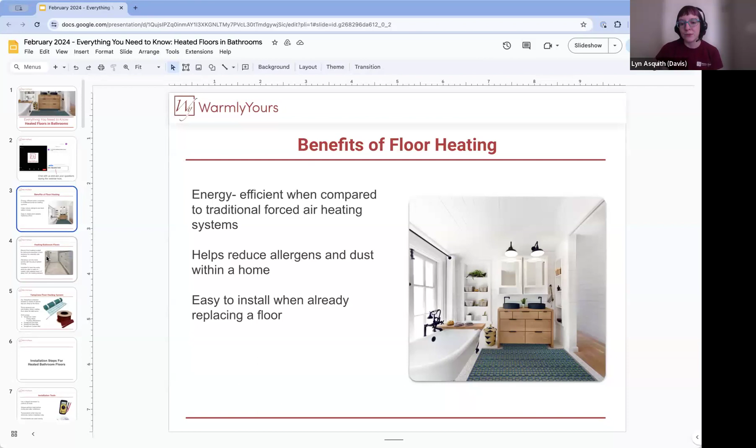These products are really easy to install. If you're already going to be replacing the floor or you're doing a new build, adding floor heating is a really great option.

Scott, can you tell us a little bit about why people would want to heat in a bathroom? Because tile is cold and it's very cold to your feet, and tile can also be cold if you don't have heating wire directly under it.

A lot of people will say, well, can I just get a roll of heat and put it right down the middle of this walkway on the screen? I just want to put it right down the middle of the room. Will that warm up the entire room? Will that warm up the entire floor? And the answer to that is it doesn't.

You only get heat where you have the heating wire. So that's why we try to cover as much of the space as we can, because wherever your foot is going to go, you want electric heat there. If you look at this picture, not only do you want it running right down the middle of this walkway, but you can see there's a cabinet on the right side there. You're going to want the heat in the toe kick area too, because that's where you stand. If there's a mirror there, you don't want to have warm heels and cold toes. You want to get that right up there under the toe kick. So it's very important when you're looking at an installation plan or thinking about heating your space that you think about where your feet will hit this floor, and wherever that is, you want heat to be there.

Because if you look at the wire, the heat only transfers 1.5 inches on each side of the wire. That's why most of the time we do spacing at 3 inches, because that gives you 1.5 inches this direction, 1.5 inches this direction, and it gives you a nice smooth heat across your floor. If you get the wires too far apart, then you're going to have a cold stripe down the middle because it only travels 1.5 inches each direction. So that's one thing you want to look out for when you're heating the bathroom floors.

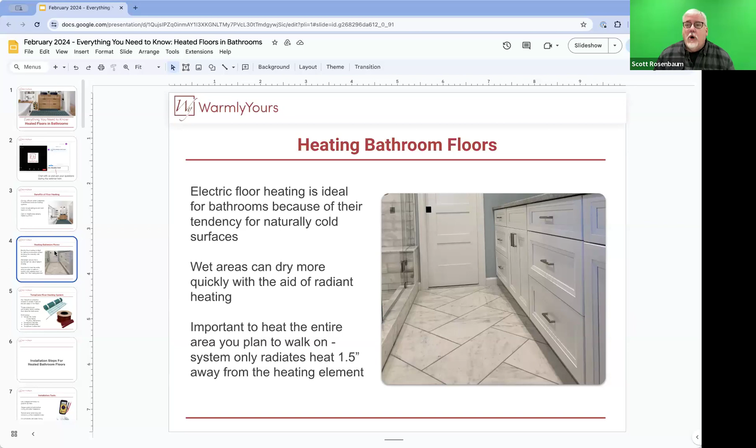You always want to remember to install your floor sensor, because that's the best way to control floor heat, is actually put the sensor in your floor. It's very important if you have a heated floor under carpet, laminate, or LVT or something like that. You always want to control it by the floor sensor.

Our TempZone floor heating system is definitely our most popular floor heating system, especially for heating in bathrooms. It includes a lot of different options that are really ideal for heating underneath tile. Also, our TempZone products are wet location listed, so again, they're ideal for bathrooms specifically.

We're going to be going over the different options that we have available for TempZone. There are a few different ways that you can install these products, so we're going to touch on each one and talk about the different installation methods and some pros and cons.

We're going to talk about our TempZone cable, which can be installed using either fixing strips or our Prodeso membrane. We'll get into that in just a moment. We're also going to talk about our TempZone flex roll, our easy mats, and our TempZone custom mats. There are a lot of different ways to heat tiled floors.

Some of our competitors only have one way to do it. You must buy this and you must buy that. You always have to buy a membrane, but for us, you don't. You can save a lot of money and time by not using a membrane on floors that don't need them. Not every floor needs a membrane with cable, and we're going to show you the reasons why.

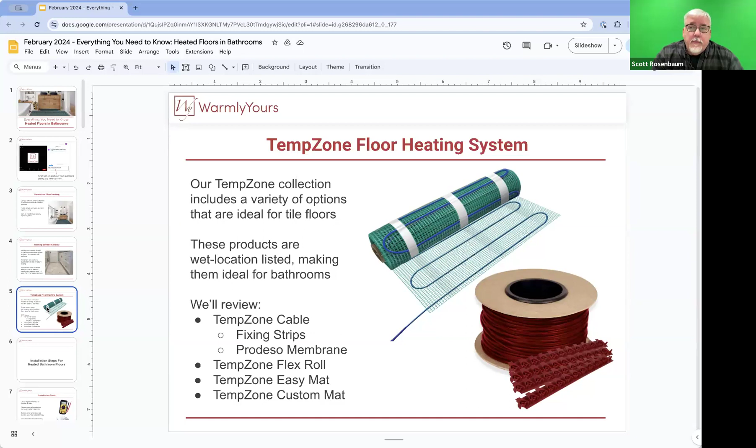So we're going to go over some of the installation steps for heating bathroom floors before we get into the nitty gritty of the different types of TempZone systems.

So Scott, can you tell us what are some installation tools you'll want to have on hand? Yeah, you're not going to need a snap-on tool truck to back up to your house to start putting these floors in. They're very simple to install. They don't require specialist tools at all.

All you need to do is go out and buy a digital ohm meter. The one pictured here is under $25 at a big box store. You should also get a circuit check when you're purchasing the product. Those are the only two specialized things you'll need, because you can't do the installation without both, since you need to test the product before, during, and after to verify a good installation.

If something happens to the product before it arrives on your doorstep, and you put it in the floor without testing it, then try to turn it on and it doesn't work, something may have happened to it on the way from us to you. The only way to know that is to use a digital ohm meter.

A digital ohm meter is not a substitute for a circuit check. They do two different things. A circuit check only monitors the wire to see if you damage it by creating a short or by cutting it open and creating an open circuit. The digital ohm meter gives you ohm readings that you use to match the label that comes with your product, to see if it's within certain specifications.

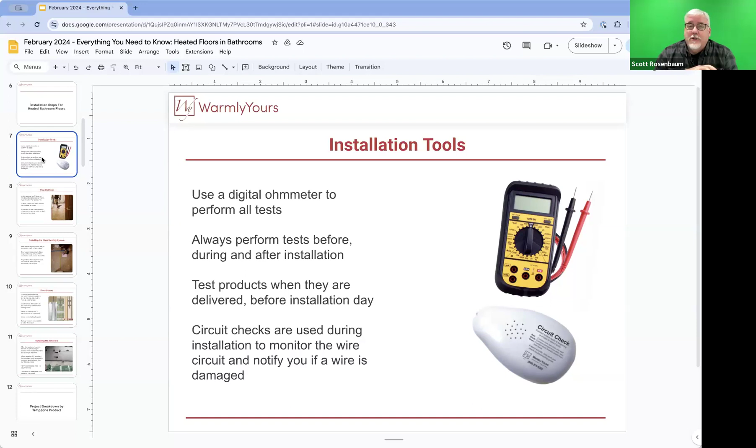Otherwise you're going to need scissors, and maybe a hot glue gun. A lot of people have those, but a hot glue gun is something you definitely want to get, because that's going to help you install it. But that's about it. Everything else you can find in your junk drawer. If your junk drawer is like mine, it's about the size of a house, and there's a lot of junk in there - I could literally raise the Titanic with the stuff in my junk drawer. But the only specialized stuff you need is what you see here.

So the first step is preparing the subfloor. You want to make sure you're installing on a good surface so you're starting out really strong. So Scott, can you tell us how one would prepare a subfloor?

Yeah, if you want to stick something to a subfloor, the subfloor has to be clean. You can't have it be a dust bowl - you've got to get that surface clean. Maybe mop it up or vacuum it, whatever you need to do to clean it, because the hot glue needs something to stick to. You need to be able to adhere that product to the subfloor, and the only way to do it is if your subfloor is clean.

Also, you want to make sure that there are no nail heads sticking up out of the surface, because if you have a nail head sticking up and you put the cable over it and then step on it, you're going to smash that cable and cause damage. So you don't want that to happen.

So you're going to want to make sure that you pull all the staples. If there are any staples in the surface, you want to pull those all out. If there are any nails, you want to make sure you remove those. And any screws that need to be screwed down, you're also going to want to do that.

Also, if you are going to be using self-leveling, you need to clean it and then put primer down. But what you want to do is clean it and then seal any holes in the subfloor, because any holes in the subfloor will cause that self-leveling to visit the floor below it, which means your living room could be full of self-leveling if you don't prep that floor correctly. So seal any holes, clean it up, and prime it if you're going to be using self-leveling.

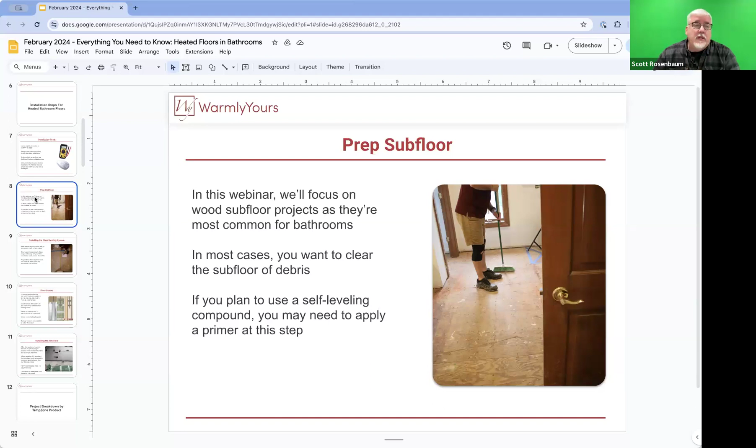So one of the first things you'll want to do is mark areas where the product is going to go and where it's not going to go. This way you have a really good idea just by looking at the space, kind of what you're going to be working with. One of the things that we offer here at WarmlyYours that is really going to make this a lot easier for you is our SmartPlans.

And we're going to touch on those a little bit more in just a moment, but these are going to actually show you step by step all the installation instructions, as well as a layout of the product in your specific space, so that you know exactly where the heat will be going, where it won't be going, and then you can make sure that you are laying it all down properly.

One of the things you also want to make sure that you're doing as you're laying it down is that you are securing either the cable or the mesh, whichever system you're utilizing. Make sure it's secured to the subfloor well.

Yeah, the number one thing, I talk to people who are interested in getting a floor heating system, and they call in and start asking a zillion questions because they want to try to figure out, how do I lay this out? How much should I buy? I'm trying to figure out how much I need to buy online.

The simple thing is just make a sketch of the space and give it to us. We'll do the installation plan for you.

The number one thing I see, new people are full of consternation, because they're trying to figure it all out for the first time. It's like I'm trying to build a rocket ship for the first time, and I'm just going to go on YouTube and look about doing rocket ships. I'm going to let the rocket ship people put that rocket ship together for me, and I'm going to worry about other stuff.

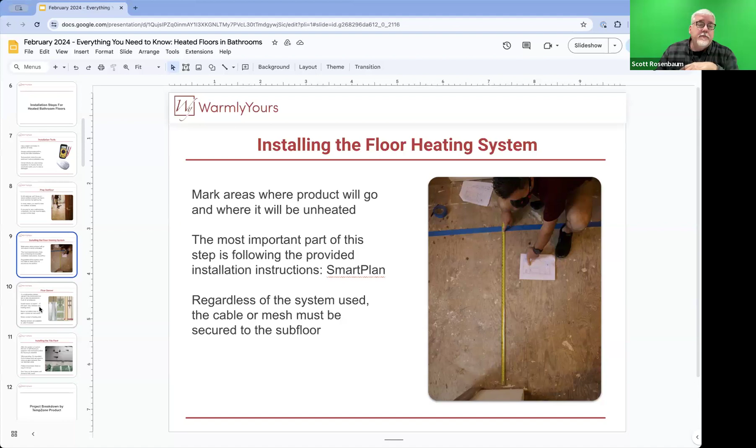So we're supplying the measurements of the area that we can heat. Just give us a sketch of the room with dimensions, and mark on that area what's going to be there, like if there's going to be a cabinet, no heat there. There's going to be a tub, no heat there. If you want heat in the shower, let us know, we can do that. Don't try to figure it all out if this is your first time, because there's a laundry list of things we already know we'll take care of for free, no charge. Why work harder when you can work smarter and let us do the work?

So our floor sensor is going to be one of the really important aspects of installation. You want to make sure that you're installing that sensor properly so that you can control the floor heating exactly to the degree. Scott, can you tell us some tips and tricks when installing a floor sensor in the system?

Sure. Number one problem I see with people installing floor sensors is they want to run it out into the middle of the room. You don't need to do that. You simply need to get it 6 or 8 inches into the open loop. This is what we call an open loop, where there's no cable that your sensor is going over. Same thing here with our floating floor system, it goes between 2 of the heating wires. You just put it between the 2 heating wires, because you're getting heat 1.5 inches from each side, and it's going to heat up that sensor. If you get that sensor on top of the wire, it'll heat up too fast, and your system will just go on and off repeatedly, and it'll never get warm.

So make sure you put it in the right place. Look at your room in the morning, during lunch hour, and at night or in the afternoon, and see where the sun hits the floor, because where the sun hits the floor is where you don't want the sensor. That sun will usually warm up the floor more than our system will, getting it much hotter. So you don't want a sensor sitting there in the sun, because that area will say, oh, this floor is really warm, but it isn't really warm everywhere, it's just warm there while the rest of the floor is very cold. That's why you never put the sensor where the sun will hit it. Always try to keep it out of the sunshine, into the heated area.

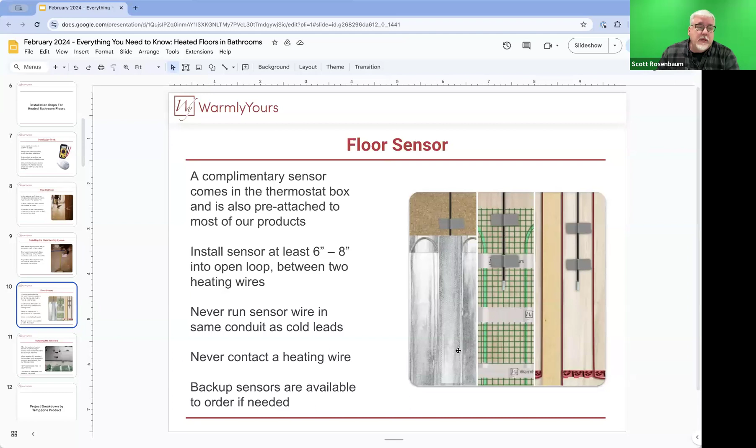Yes, that was comprehensive. Thank you so much, Scott.

So once you've laid out the system, and we'll be going over that process shortly, you'll want to lay out either your thin set or the self-leveling concrete, whichever you're using, before the tile floor is installed. Scott, I know you've worked on a lot of these projects where the tile floor is being installed - can you tell us some tips and tricks when actually putting the flooring down?

If you're looking at this picture and you see this in your house and you're doing this installation yourself, and it's your first installation, I can guarantee you've used a laundry list of expletives up to this point, because this is the single step method. It's very difficult for beginners, and even some experienced people, to get this installed with no lippage on the tile, doing this all in one step.

This is the single step method where they put the system down on the floor, the green mesh, then put thin set, and then push the tile down into that. It's very difficult to get those tiles the right height and make sure they don't have one up against another - that's what lippage is. One's really high, one's really low. So whether you're doing this for the first time or the tenth time, you might want to take a different approach.

Cover it with 1/4 of an inch of thin set first, come back tomorrow and then put thin set under the tile on the back of the tile, and push the tile down using these levelers, because that will do a couple things.

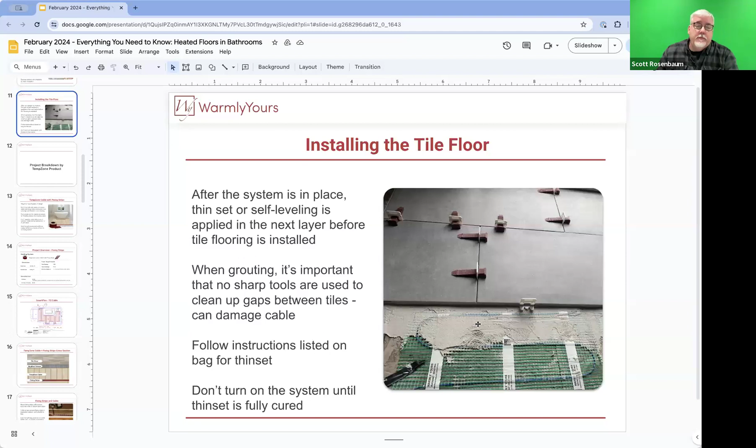Yes, it is exciting. I totally understand wanting to turn it on right away, but make sure that you're waiting just a little bit longer, and the patience will pay off.

So we're going to go over a project where we were heating in a bathroom, and we're going to show the different TempZone products in that space and how they would be installed.

So we're going to be starting out with our TempZone cable, and specifically we're going to talk about installing TempZone cable with our fixing strips. Using fixing strips with cable is a really great way to have a lot of flexibility in the design and layout of your heat. It's great for rooms that have odd angles. If there's a curve in the wall, something like that, it's going to be very easy to get into those weirder, harder to reach areas than if you were cutting and turning a mat.

Scott, can you kind of tell us about the spacing when using fixing strips? Yeah, the fixing strips, the little knobs are spaced 1 inch on center. So if you do 3 knobs, that's 3 inches. If you do 4 knobs, it's 4 inches. So it's very flexible, allows you to do different spacing if you want to.

Just keep in mind that a small bathroom on the second floor above a heated kitchen with no exterior walls and no windows takes a lot less watts per square foot than a large huge bathroom on a concrete slab with 27 windows, 3 exterior walls and skylights. Those are both bathrooms, but they take completely different amounts of power and watts per square foot. So a second floor bathroom, you may be able to do 4-inch spacing using these spacers, whereas one over an unheated crawl space, you'd want to use 3-inch spacing. But 3-inch spacing is as close as you can get, so you don't want to go any closer than that.

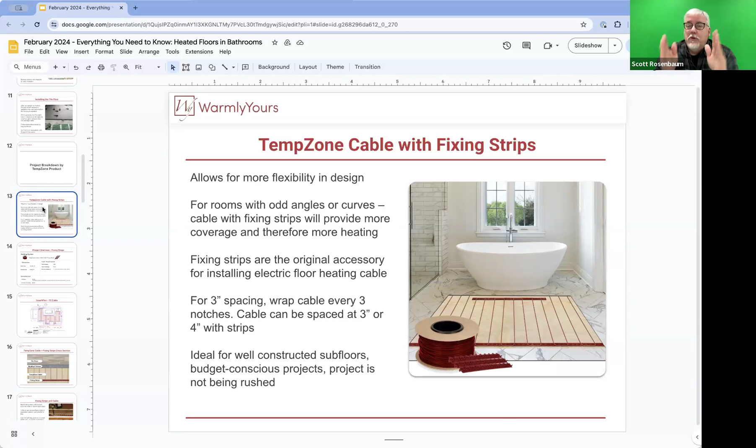But this is a great way, it's a great budget option. You don't need a membrane here. If your floor is in really good shape and you've got good spacing on your floor joists, you don't need an anti-fracture membrane. You can use just the cable and the strips and save yourself hundreds of dollars.

So the project overview for this specific project with fixing strips, the total area of this bathroom we're looking at today was 123 square feet. When you're heating with the strips, we got to about 94 square feet of heated area. So the breakers, you're looking at just one 15-amp breaker. It's about 11, almost 12 amps, and you're looking at just about 5 cents an hour to run.

We're going to be comparing the project overview for each of our different types today so that you can actually see the different types of heating systems and how much coverage they'll give you, what the operating cost will look like, and the differences between those.

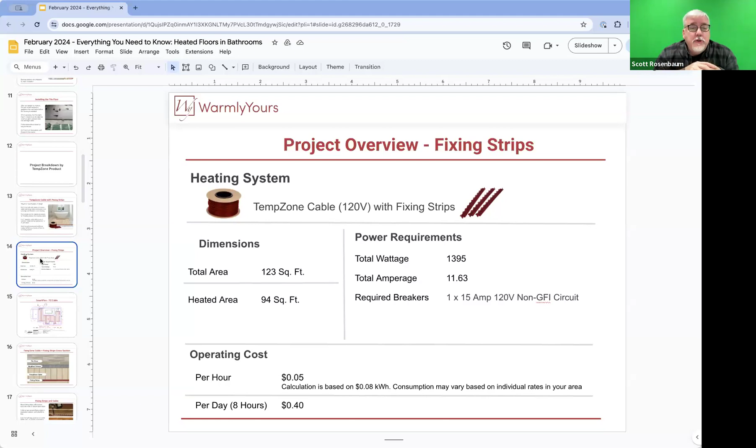When people think about doing their bathroom, they think, I'm going to heat every square inch of this bathroom. And you're not going to heat every square inch of this bathroom. You're usually going to heat around 80 to 85% of the bathroom because of things like a bathtub, a toilet, spaces around the walls, a shower. You can heat the shower if you wanted to, but that's the area of a bathroom. You're going to heat about 80 to 85% of it, just depends on that particular space.

You can see what's great about this smart plan we're telling you about. In this smart plan, it tells you what the amperage is, it tells you what the total wattage is, it tells you all this information, cost per hour, it's all listed there at the bottom. It tells you what product you're going to install and what spacing you're going to use. And that's all been figured out from the drawing that you gave us. So if you look here, the important things on a smart plan, and we're going to talk about them here and then gloss over them later, but you're always going to look for a T because that's where your thermostat is.

You're always going to want to look for a triangle because that's where the cable starts, and you're always going to look for a square - that's where the cable ends. Also on the plan, you're going to be looking for the halfway mark for the cable, and that's going to be a red dot because on the cable, it's a white dot since the cable's red. So we put a white dot on the cable, and that way if you see your white dot's over here, it tells you you've got the spacing too tight. If your white spot is all the way over here, it tells you to use 4-inch or 5-inch spacing instead of 3.

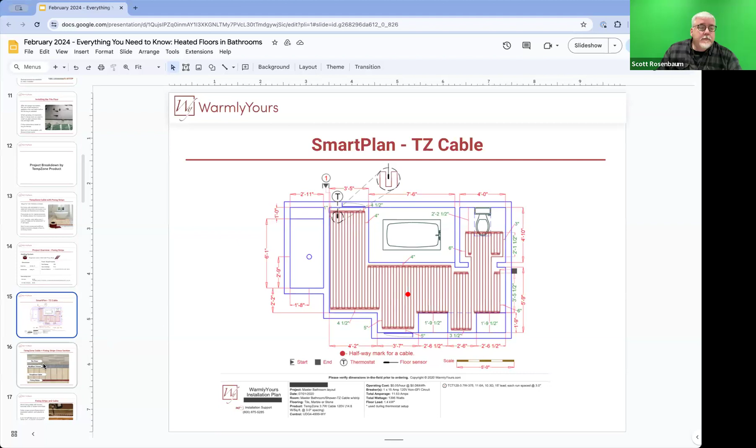Yeah, and if you're going to be using self-leveling instead, you're going to put a piece of masking tape every 2 feet across these, because that's going to keep it down and keep it from floating to the top of the self-leveling. No matter whether it's just the loose cable or the mesh and cable together, it's always going to want to float, so you have to make sure it stays down on the subfloor very well. That's why you need a clean subfloor.

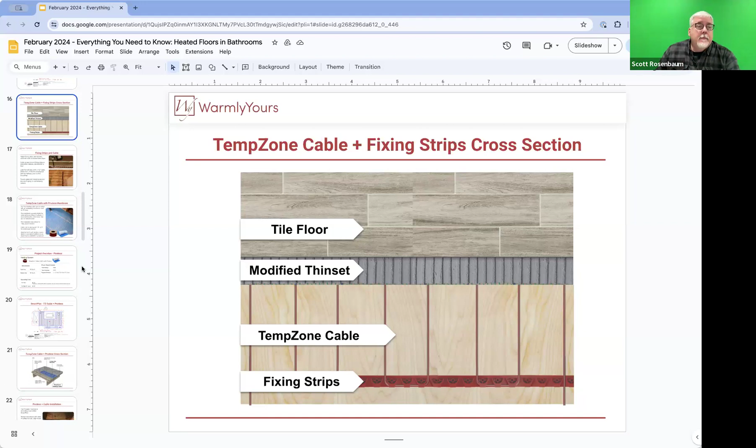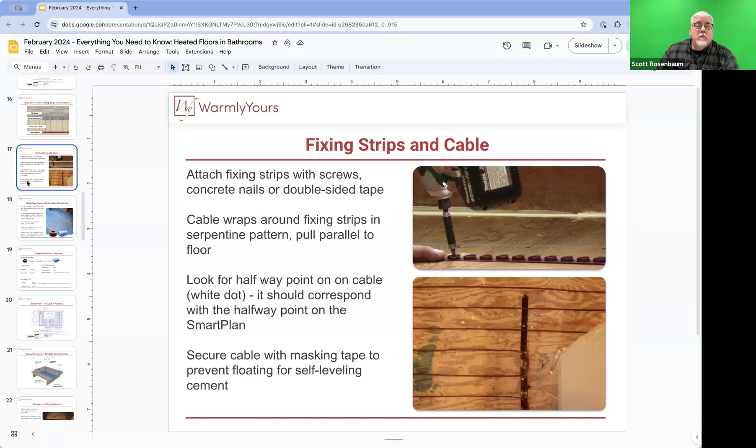Awesome. So moving on to our TempZone cable with our Prodeso membrane. This is a really common way to use TempZone cable, or heating cable in general. It's going to generally make the project a little bit faster to install, and it also adds a lot of extra support to tile floors.

So Scott, can you tell us where a Prodeso membrane would come in when you would want to use one? When your subfloor is a little bouncy, because it's isolating the tile from the subfloor. So if the subfloor deviates, if you step on it, if it creaks or anything like that, the membrane's here and the tile sits on top of it. Whatever happens underneath, the tile still is okay because it's on top of the membrane. That's what you're doing - that's when you do need a membrane. Not every single floor needs one, but when you need it, this stuff is very good.

What's also good about this is you can change the spacing as you go. What we're showing here is spacing every 3 spaces. You can also do 3-inch, or 3 space, 2 space, 3 space, 2 space, etc., to help use up cable, or add an extra space to use less cable. But this is an area where people walk all the time, so we put it about 15 watts per square foot here, with a 2-3-2-3-2 pattern. That can help you use up that cable if you have to. So that's where we're seeing the 2 different spacings on this floor.

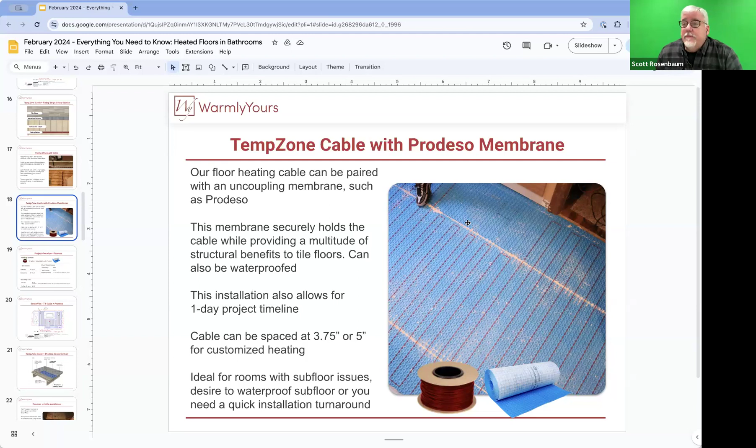One other thing about Prodeso is that it is also able to be waterproofed. So if you're waterproofing that subfloor, doing a wet room, or if that's just an extra concern for you, adding Prodeso is a really great option. All you need to do is buy our Pro Band, which comes on a roll, and you adhere that after you get the cable in, to these seams, and that will make your bathroom waterproof. Which is always a good thing.

So the project overview for cable with Prodeso. You can see again it was a total area of 123 square feet, and we heated about 107 square feet with this application. The cost per hour is 4 cents, so it's not very expensive. It is a very efficient system, cheap to run, and it's going to be a very easy system to install as well.

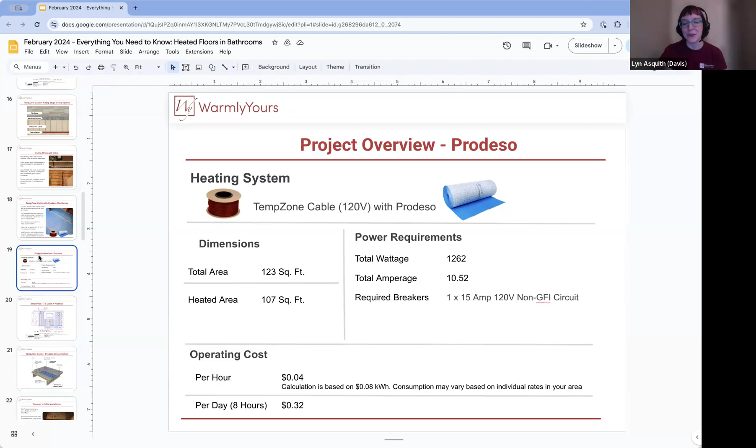That's why you can't just cut it and say, okay, I've used enough, I'm going to cut this off and throw the rest away. You can't do that. That's why this design is so important, so we get you the right amount. You don't have too little, and you don't have too much. When you're doing the installation, it's always better to have a little too little than a little too much.

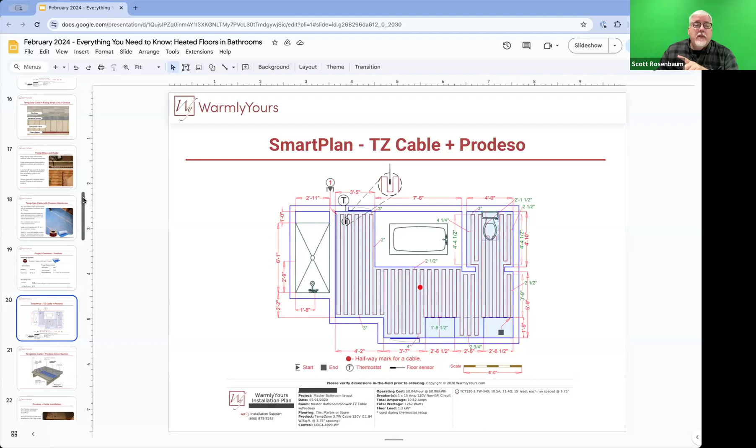With a wood subfloor like this, it's modified thin set. Then you put the thin set down on the floor, push the membrane down into it, run the cable back and forth, put thin set over the top, and lay your tile on top.

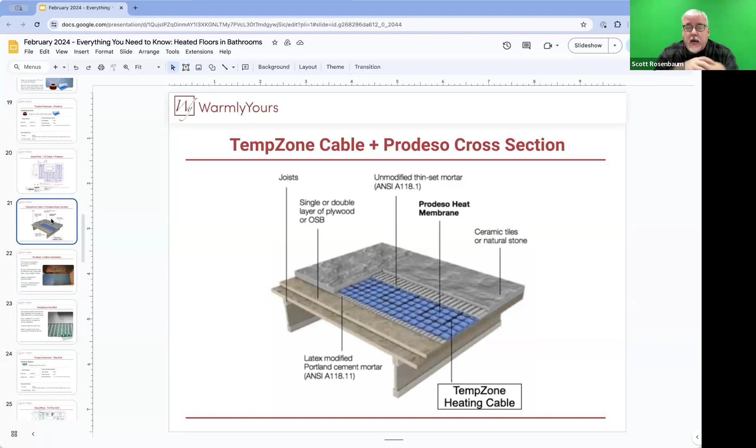When you're doing the install, it's very important that if you're only going to get so much time, let's say you start at 4:30 in the morning and end at 1 in the afternoon. At 12:30 you realize you've got enough time to do this much today, this part over here. The idea with this product is you don't cover the entire floor with thin set and come back tomorrow.

You only put thin set under the areas you're going to tile right now. You work your way across - thin set, push the tile down into it, thin set, push the tile down into it. You're not thin setting the whole thing. When we first started selling this years ago, people were used to using the cable on the mesh.

What you do there is lay it all out, then cover it completely with thin set, and come back tomorrow to do the second step. You don't do that with this one. You get it down, get the cables in, and only do enough for the tiles you're using. Very important to do that.

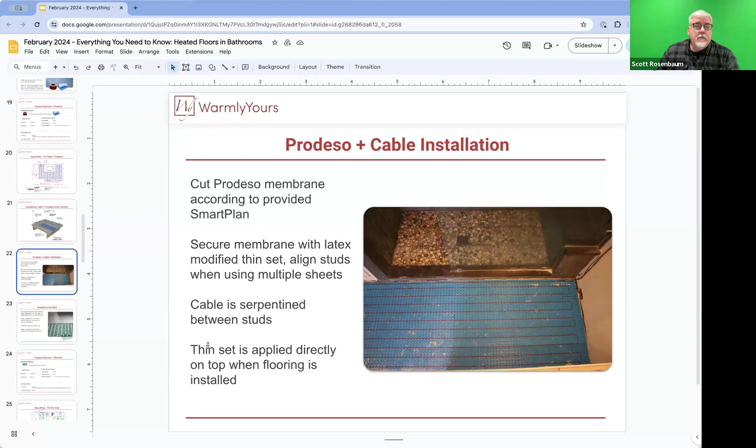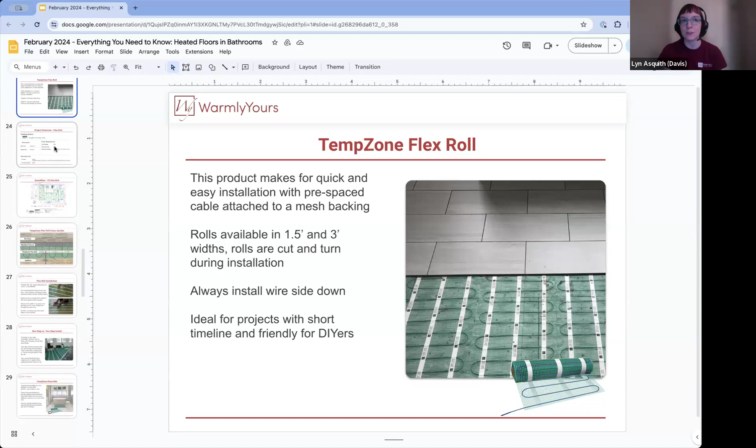The flex rolls come in either 1.5 or 3 foot widths. Using a smart plan, or having one designed for you by us, is going to tell you exactly which size cable or roll you'll need. With this project, with the flex roll, we covered about 90 square feet, and again we're looking at about 5 cents an hour.

As you can see, they're all going to give you similar results in terms of operating cost and heated area. It really often comes down to how you want to do the installation, as well as other things like whether the subfloor is well built.

People say, well, I don't want to spend this much each day. Then all you have to do is, instead of 8 hours, go to 7 hours, or 8 hours down to 6 hours. You can set the temperature lower and also cut down the number of hours you're using it. Remember, the idea is to only heat the space when you're in it.

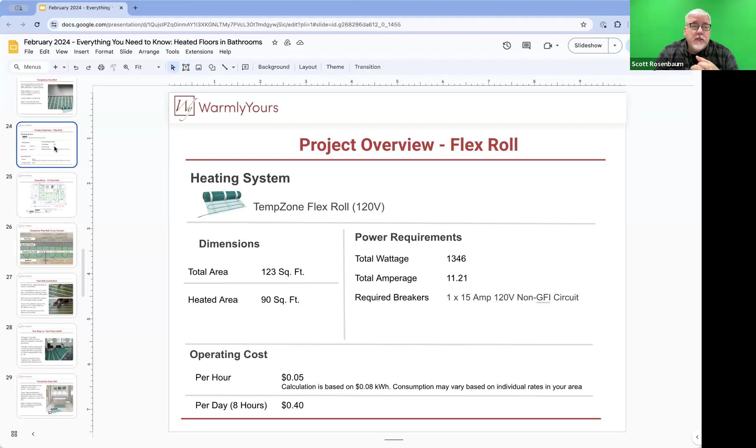There's no reason for it to run otherwise. If this is a bathroom, it doesn't need to be on if you're at work all day. And you don't want it on at night, because no one's going to be in there stepping out of the shower usually. So the idea is to use it only when it's needed, and that's what's going to save you money.

Yeah, you're going to need a tape measure here - that's going to be your best friend - and a pair of scissors. Here's our T, here's our triangle, and here's our square. Here is the distance we're going to run the mesh out - we're going to run the mesh out 3 feet. We're then going to cut it.

We're going to turn it, flip it around, cable side down - always cable side down as much as you can. Then we're going to run it 2 feet 9 inches, turn it, run it 2.9, 2.9, 2.9. We're simply rolling it out and laying it on the floor - not adhering it to the subfloor yet. We're only doing cuts and turns, making sure all of our runs are going to fit.

Because the last thing you want is to get here and realize you're a foot short, needing to come up with a foot. Now you've got to undo all the hot glue or staples you put through the mesh - you never ever staple the cable - and you have to go back, lift it all up, move it around, and put it back down. Just don't do that yet. Make sure it all fits, make sure everything is where it needs to be. Then you can start hot gluing it to the subfloor.

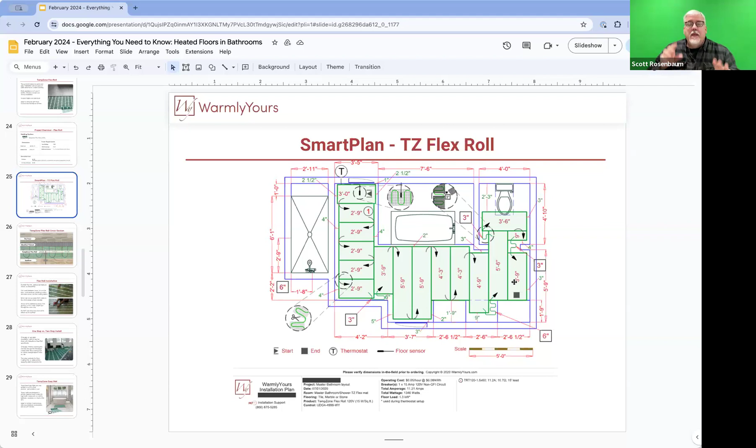That's all you need to do. If this were going to be covered with self-leveling, then you'd want to make sure the TempZone flex roll is installed very well, and that it's adhered to the subfloor. We don't use the tape to adhere it to the floor—the tape is simply to hold the cable onto the mesh.

If you take it off, the cable will just fall out on the floor in a loose pile. You don't want to do that, so leave that tape alone. It won't affect the bond. Then you can put thinset and tile over the top of that.

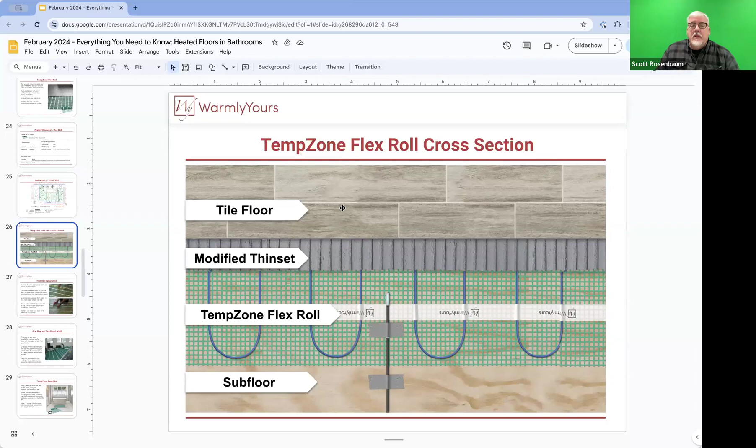So looking at the actual installation, we had talked about it briefly during the smart plan. You're going to really want to follow that—like you said, Scott, use that tape measure. It is your best friend, follow it as closely as possible. Can you tell us some installation tips or tricks? I'm sure you have quite a few with your experience.

Hot glue is going to be the best way to do it. The best way to put hot glue down is to put the gun underneath it, push it down into it, and then use a metal chisel—like a really wide 2-inch metal chisel. You're not going to be chiseling into it; all you're doing is pushing it like a brush, pushing the mesh down into the glue, because you don't want to burn your hands.

Don't ask me how I know about burning my hands using hot glue. If you don't do it that way, you're going to push it down and go, whoa, that's really hot, and you'll have burns all over the place. But if you use that 2-inch or 1.5-inch wide chisel like a brush and push the product down into it, you just hold it there for a couple seconds and it'll grab. That's the best way to do it.

You can also staple through the mesh, but as soon as you say that, people think they can staple over the cable. If you staple over the cable, you're going to be replacing the whole thing, because that staple will damage it. Never ever staple the cable, and never staple the lead that runs from the wall over to it either, because you'll damage it. Hot glue is the way to go.

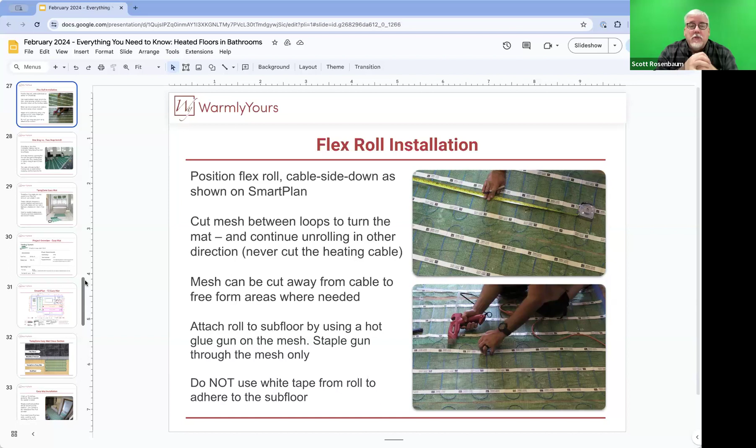All right, we had touched on this a few times already today, talking about the 1-step versus the 2-step installation method. Can you tell us which one you think is best, if there is a best option?

Yeah, if you've done less than 100 of these floors, do the 2-step—and I'm not talking about the Texas 2-step. You don't want to be dancing over the cable, but you want to do this 2-step method: lay it out on the floor, adhere it to the subfloor, cover it with 3/8 or 1/2 inch of self-leveling, then come back the next day and tile over the top of it, because that gives you a perfectly flat floor.

Or you can use thinset, which allows you to use those levelers you see there, making it much easier so you don't have to worry about a leveler getting stuck underneath the cable and pulling up on it, catching the cable between the leveler and the tile. So always watch out for that. The 2-step is the easiest way to do it for beginners and even experienced people.

Absolutely, and always take the easy route if you can. Yeah, you're simply putting the product down and putting the thinset over the top of it, or pouring the self-leveling over the top of it.

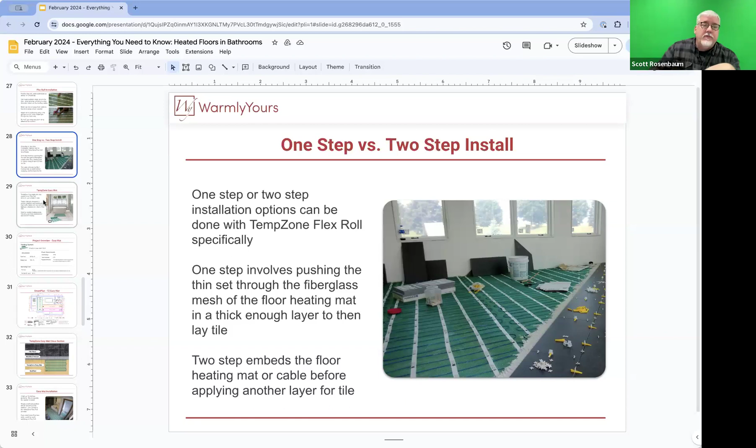It's a common misconception that you can just lay a heating roll in the middle of the room and it will spread out. Since it only goes about 1.5 inches past the wire, that's not the case. So easy mats for spot heating are great for areas where you're only going to have heat in that specific area, and you'll have a cold floor in the rest of the space.

This is good for smaller heating spaces. I have a very tiny bathroom, and I could probably fit one tiny flex roll in there and it would cover almost all of the floor. So if you're heating a small area, looking for just a targeted spot, looking to keep electrical use lower, or doing this yourself and want something super easy and simple, that's where the easy mats come into play.

Yeah, your bathroom would be perfect for a tiny dancer doing the 2-step method.

The thing with this is, if you use spot heating, where you stand is going to be warm, and when you step into the unheated area, it will be bone jarringly cold. You'll literally go from 85 degrees, or whatever you have it set to, down to 65 or 60, in the span of 3 or 4 inches. It can be 85 here and 60 right over there. It makes a big difference.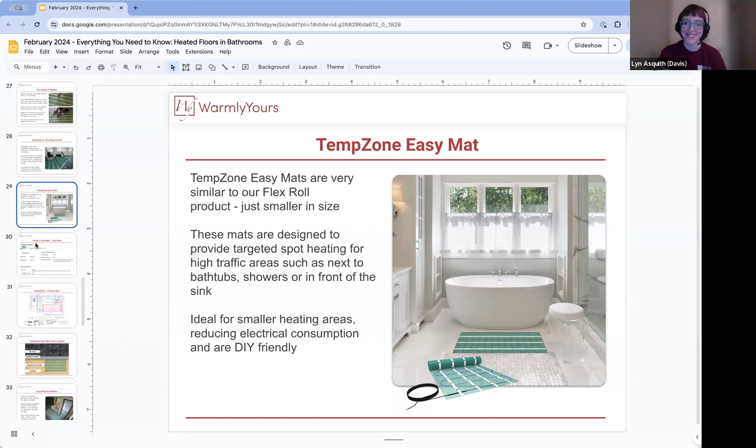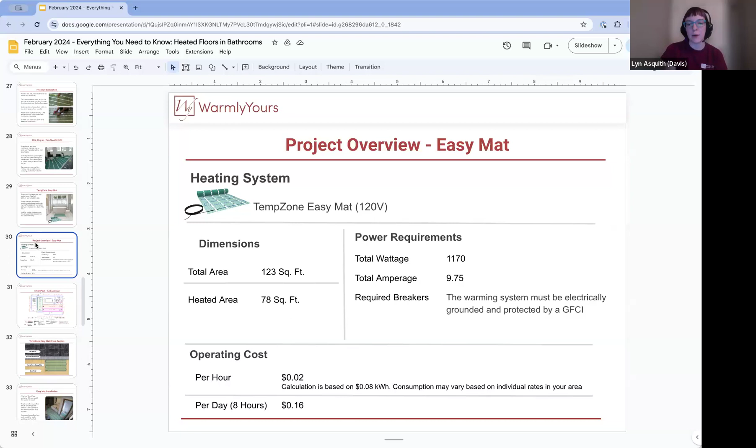So as you can see, we're going to show you the option of using an easy mat in this space. We definitely would not recommend it for an area this size, like we said. But if you were to do an easy mat system, you'd be looking at about 78 square feet of heated area, bringing the cost down to about 2 cents per hour. There's quite a bit less coverage with these easy mats, and for this room we would need to use about 4 mats.

You're going to have some very cold spots right in front of the door, maybe in between the toilet and the door to the water closet. So you want to make sure that you're aware of what areas will be covered and not covered with an easy mat. If you have a space this size, just reach out to us.

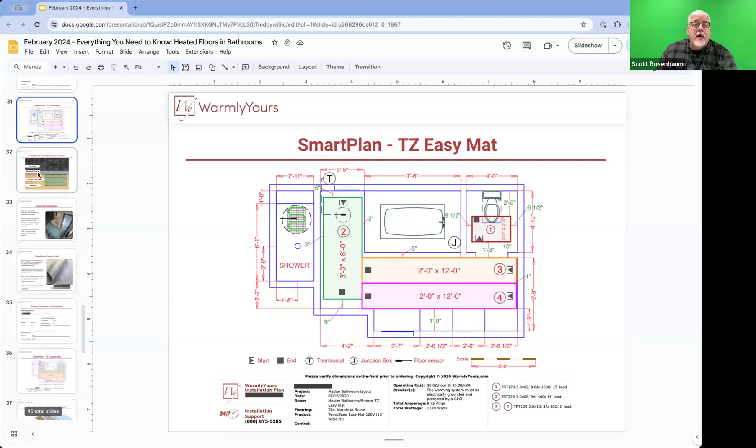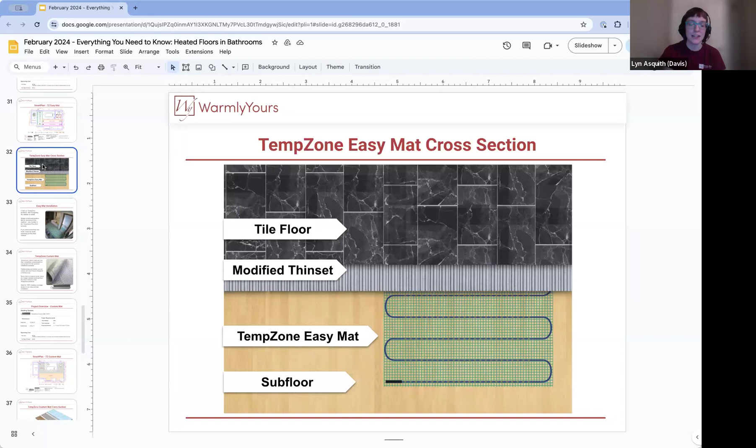We'll help you figure out the other options that'll be a lot better for you. You've got 4 connections here, which is going to be a pain in the backside. You don't want to do this install. That's why an easy mat turns into a non-easy installation. It's essentially the same as our flex rolls, just much smaller, same type of installation. You'll lay it on the subfloor, put the mat down, secure it to the subfloor, then put down your modified thinset, or if you're using self-leveling that's where that would go, and then your tile.

So like we said, this is considered a very easy installation. All you would need to do is unroll those easy mats and lay them out in the space where you want the heat to be. It's going to be relatively simple if you are looking to heat that small area. Again, if you need more than 2 easy mats to cover a space, definitely switch to the flex rolls.

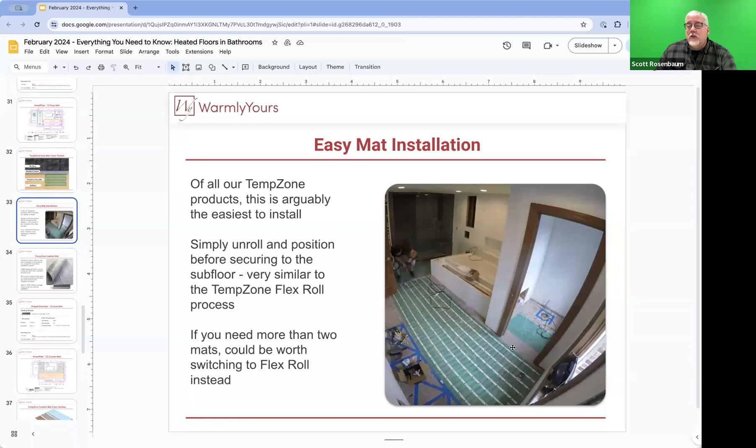Let's take a look in the water closet. You can see a big cold area here in the doorway. You can also see a lead that is not long enough to get over to the thermostat, which is over here. So you have to run this lead to a junction box in your wall, then your electrician has to supply electrical wiring to get from this junction box over to the thermostat. This is not a good installation. It's not a wise way to install this. So I love this picture because it shows us the cold spots and how hard it is to get that connection over there.

Last but not least, we have our TempZone custom mats. Custom mats are exactly what they sound like — completely customized to your project. We generally don't recommend these as much for a few reasons. They're made to order, so the timeline involved is a lot longer than our ready to go TempZone products. And you're also not going to have any kind of wiggle room if any design changes happen, if any layout changes happen — maybe the tub ends up being 2 inches wider than you thought — you're going to run into some problems.

So the custom mat is a great option. It is going to make the installation incredibly fast. It's designed for your space — you unroll it and you're good to go. However, like we said, there are also some concerns with custom mats as well. It's a fundamentally different way to install too, which we're going to show you in the cross section.

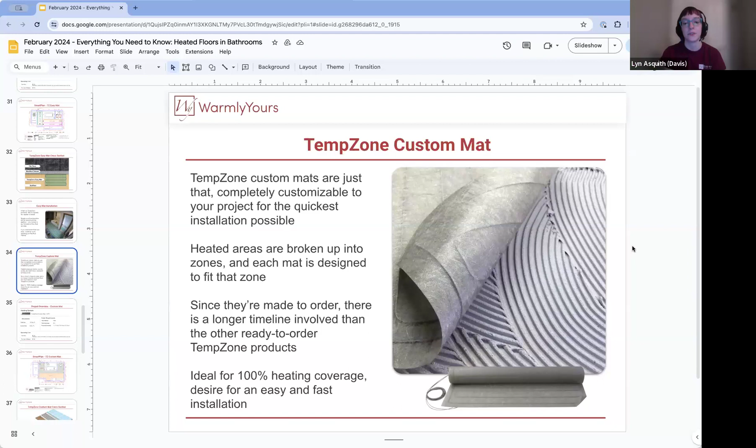So with a custom mat in this room, we covered about 93 square feet. You can even see with the custom mat, you're not getting especially more heated area or anything like that — it's just going to be a little bit of a quicker installation. So you're looking at about 4 cents an hour if you were using the custom mats we'll be showing you. And also, we show you the power requirements.

A lot of times an electrician hears, oh, we're going to put floor heating in the bathroom, and says I have to hurry up, I've got to put a 240-volt circuit in, I need to put 240, hey can you give me a 240 breaker, I need a 240. You don't need 240 in a bathroom, only if it's over 120 square feet. So if you send us a drawing of your space and it's under 120 square feet, we're going to design it in 120. The reason why we're going to do it in 120 is because 120 and 240 are just as efficient — 240 is not hotter than 120, it doesn't heat up any faster, but 240 uses 2 spots in your breaker panel while 120 only uses 1.

Ooh, I got a bunch of balloons there. I don't know where that came from — that's a new thing on Zoom, and as far as I'm aware, you can't turn it off.

I've tried, and it seems there's no real explanation as far as I've seen. I can sometimes smile and it'll make frowny faces. Congratulations, I don't know if that does... oh, okay, that didn't work.

So I'm going to be looking for the phrase here, there's some trigger word. But anyway, that's why we use 120 nine times out of 10. It allows you to use one control and the minimum size of breaker.

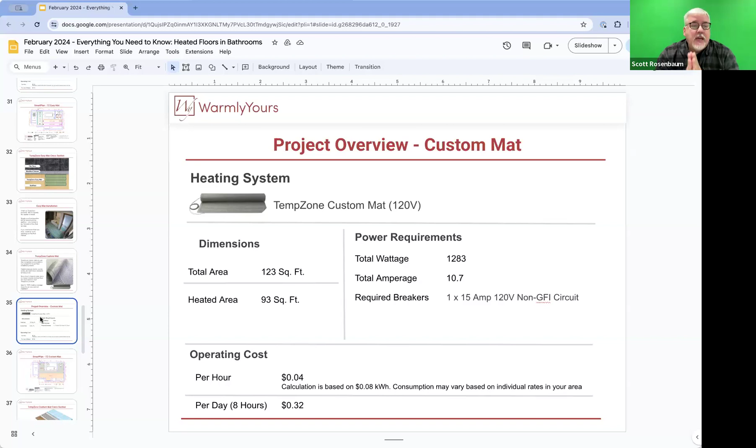Can I see anybody out there - raise your hand, theoretically or non-visually - so we can see if you've had dimensions change from the time that you quoted it to the time it was made? Virtually was the word I was looking for. It happens all the time.

And if you design this bathtub to be a certain size and then the homeowner goes, you know what, I want to make it bigger - let's make it bigger - well, as soon as you make it bigger, this mat's not going to fit anymore. And you can't cut and turn it, it's not designed to be cut and turned. You lay it out on the floor. So that's the problem with these, is that you have zero wiggle room, like you said.

And that's what happens in the real world - dimensions change and all of a sudden, where do I put this? Can't cut it. Yeah, custom mats can be a really good option. I've seen them used a few times and they are really great. I've also seen them used and then people run into problems like that. So definitely talk to us if that's something you're interested in, and we can help you figure out if a custom mat's a good option for your job.

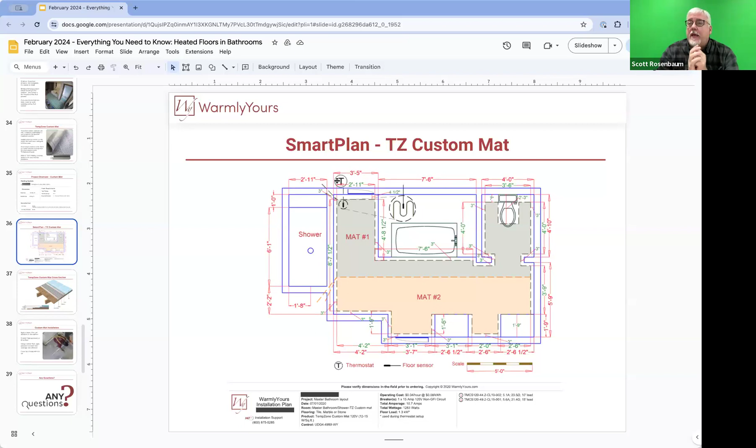This is going to take 2 connections at the back of the thermostat too, because you've got a mat that connects here and a mat that connects here. So you actually have 2 separate mats running to the back of your thermostat. So just keep that in mind - you're going to 2 connections here instead of 1. And the difference of installing it right here...

Yes, can you walk us through what that looks like? This means you put it down - you put thinset down on the subfloor first, and then you push this product down into it, because this gray random mesh, it's not sewn, it's not spun, it's randomly placed, but thinset can't get through it.

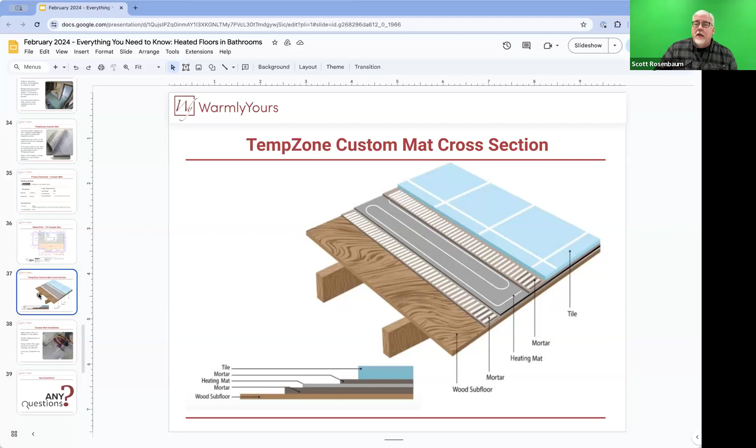So what you need is to put thinset down, push this down with a grout float or something, pushing it down into the system. Then you have to put thinset on top to set the tile on. So it installs fundamentally different - please keep that in mind. You can't lay it on the floor and then cover it with thinset, because then you'll just be able to lift it right up off the floor.

And you can see here, we can walk you through it - the thinset is down on the floor, we're pushing the mesh down into the thinset right here. That's what that flat grout float or rubber float is doing now - it's pushing it down into the thinset.

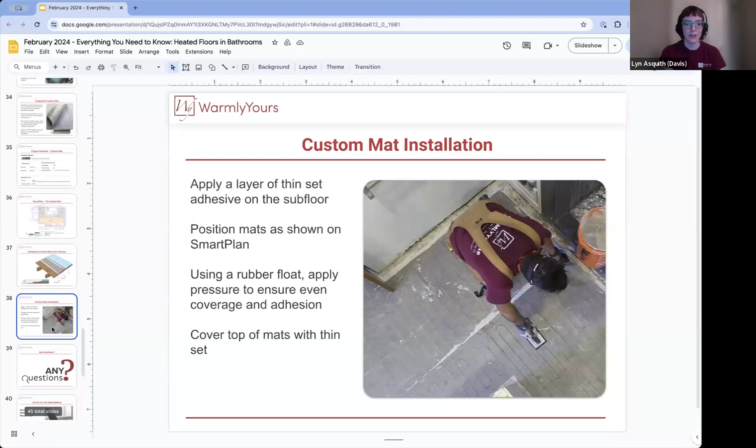Using heated floors under a membrane. Some people want to buy a waterproof membrane, and usually those waterproof membranes have 0 R value, which means the heat can go through it.

The main thing to remember with our product is I can't tell you how to install somebody else's membrane because they have their own rules, but our heating wire needs to be embedded in modified thinset. So you put that product in modified thinset, and then the 0 R value membrane over the top of it. You need to follow the instructions for that membrane manufacturer because they may want it unmodified on the bottom and modified on top, or unmodified and unmodified, or modified. They're the ones that have those rules about what goes where.

Our rule is you get our floor installed and we want the heat to be within 1 to 1.5 inches of the top of the surface. What you put in between is up to you, but you don't want any R value between the heating wire and the top of the tile. So with modified thinset, the company you bought the membrane from is going to tell you how to do that, and then you're going to set the tile on top.

Awesome. Next question, question number 2. I keep looking for the balloons and stuff, but I don't see them.